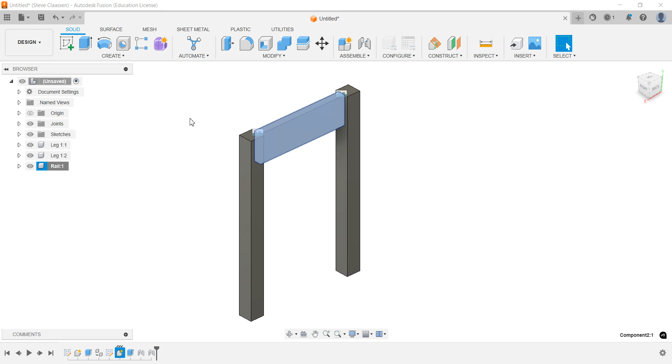So we left off with one half of our table like this. What we're going to do now is copy it and make the other half. Again, why do all the work when you don't have to?

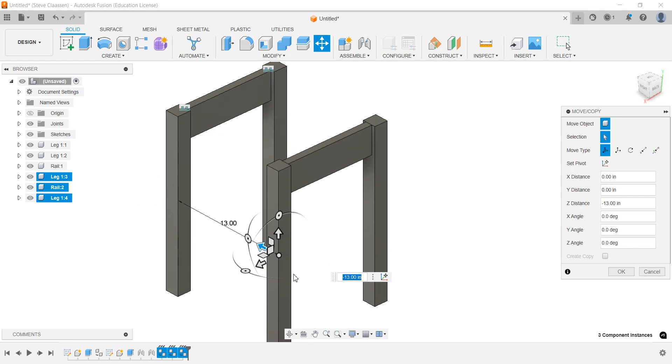I'm going to highlight everything, right mouse click, copy, come out here somewhere, right mouse click, find paste, not paste new, paste. This time I'm going to pull it out like this and rotate it right away. The reason for the rotation is that we may want to do something else to the rails, like put a slot in them.

If we rotate it right away to 180 degrees, whatever we do on the inside of this one will happen on the inside of this one. That's why we rotate. I'll click OK, and there we go. So it doesn't matter what position we're in, not really. But what we are going to do is copy one of these rails now over to here.

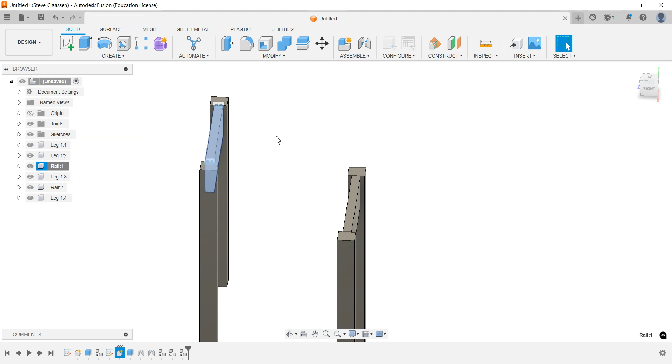So let's go find rail, right mouse click, copy, right mouse click, paste, not paste new, paste. Again I'm going to pull it out, and then rotate it this way so the inside is still to the inside, rotating it 90 degrees. I can push it out here a little bit if I want, and click OK.

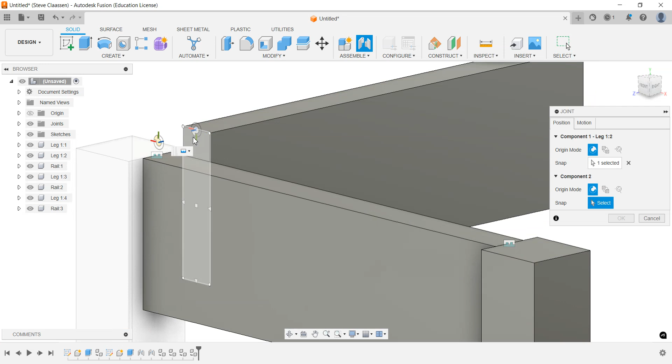Now, once again, zoom in and let's do a joint. We're going to join this one here to this here. You can see they snap into place. That puts those halves together, and then again we're going to do these ones. So joint, take this one here to this one here, and you can see it move in place. Click OK.

What happened there? Well, obviously those two, the joint was lost when we copied it. So what we're going to do is just go back to joint here, click here, spin around, and finally do that one. That'll move everything eventually, put everything back in place.

There we go. The final one is let's take that rail. Right mouse click, go copy. Right mouse click out in the middle here, go paste. Whoops, let me try that again. Right mouse click, go copy. Forgot what I clicked there. Right mouse click, go paste.

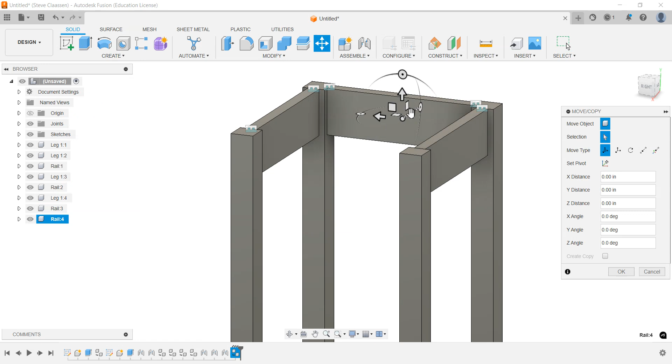Again, I'm going to pull this out and rotate it 180 degrees. I'm just going to type 180, click OK. So last part, join this. I'm going to join that one there, scroll around to that one there, click OK.

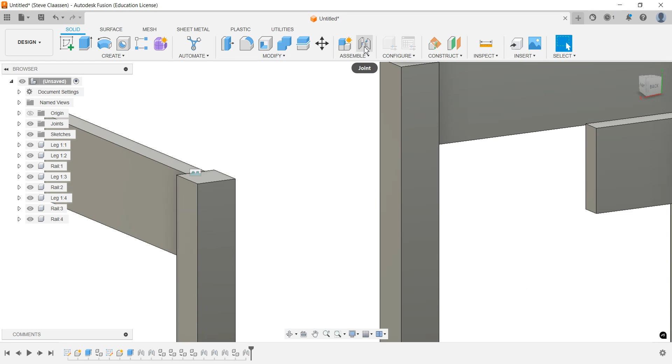Oh, you can see that those things didn't like each other. So we're going to join here, right there, and we're going to come this way and joint there. OK, and there we go. We have our end table.

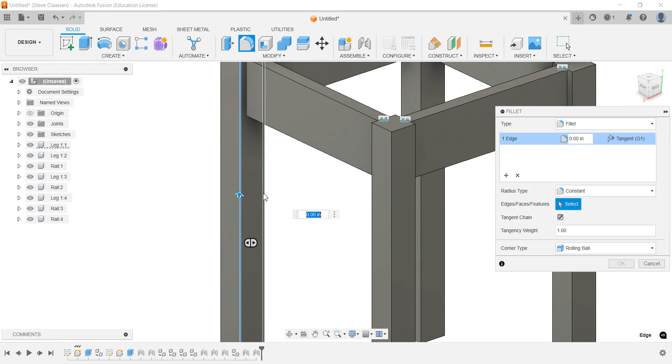All right, so we have our finished end table now. Basically your legs and your rails, everything's been spun the right way. Here's the cool thing: if I go to fillet and let's say I want to fillet all 4 of these edges, I can go all the way around on one. If I fillet this to 0.5, every single leg just did it, you can see it did it on every one of them. That's the power of copying and pasting a component: whatever you do to one, you do to the other.

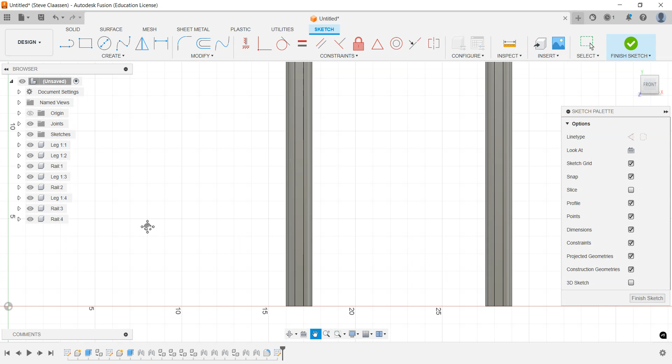So same thing, let's say I need to make a slot in here. I do a sketch, whoops, let's move it back into place. So you can see this. Zoom in, and I'm just going to put a hole in the inside here for something to do. There's our hole, there's our finish. Let's extrude it, and now if I extrude and go in just a tiny bit, you can see that it's happening on all 4 legs.

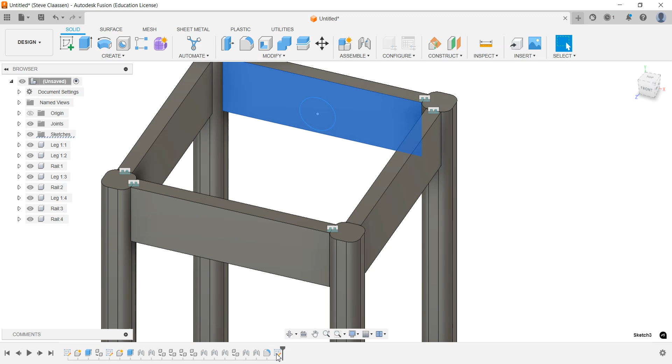All right, so I'm just going to hit escape out of this, go back. I'm actually going to go to that sketch, this circle, come down here to the timeline. There it is right there. Right mouse click, I can go delete and get rid of it. At this point, same thing, I'm going to get rid of my fillets. Right mouse click, just delete my fillet down here on the timeline. Okay, and I'm back to my basic table.

Now we're going to stop there and continue on with a few other things in the next tutorial.